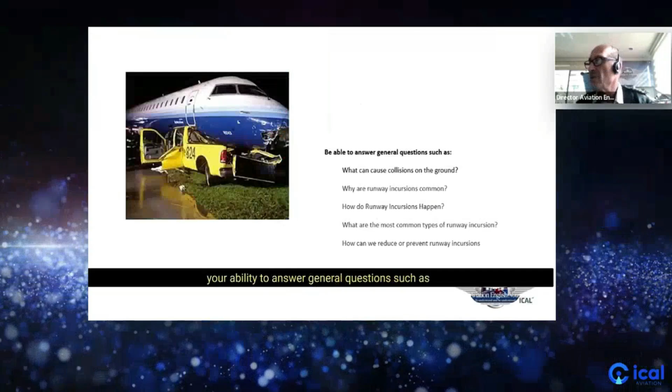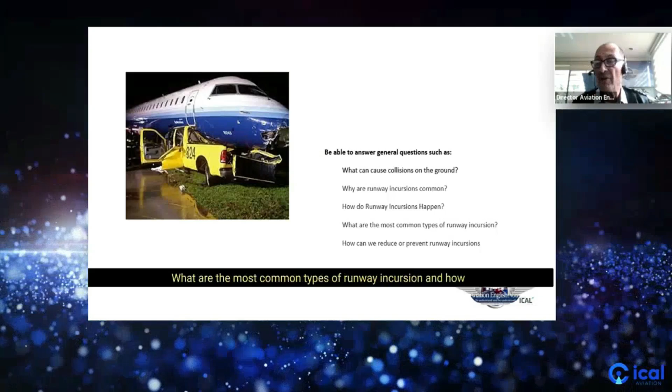A particular focus is going to be on your ability to answer general questions, such as what can cause collisions on the ground, why are runway incursions common, how do runway incursions occur, what are the most common types of runway incursion, and how can we reduce them. When we're in our ICAO exams, doesn't matter if we're listening to the ELPAC, the ELTS, the TEA, AVANT, or any other exam ICAO puts out there, your ability to understand the communication is critical.

For example: Situation 2. We can see some animals on the runway. You need to go around. So you're on approach, your controller's saying this, and it's critical that you're able to read back the complete message. What is the problem here? The problem is animals, but the main instruction is what the controller's saying: you need to go around. Why? Because we can see some animals on the runway.

Another example. Situation 6. We can't continue taxiing because there's a piece of rubbish on the taxiway. So what we have here is a pilot actually saying that he has a problem continuing taxiing. Why? Understanding the vocabulary - there is a piece of rubbish on not the runway, the taxiway. All the information is important, and we have to read it back correctly.

Situation 5. There's something on the runway. We can't take off. Pilot reporting he cannot take off. Why? There's something on the runway.

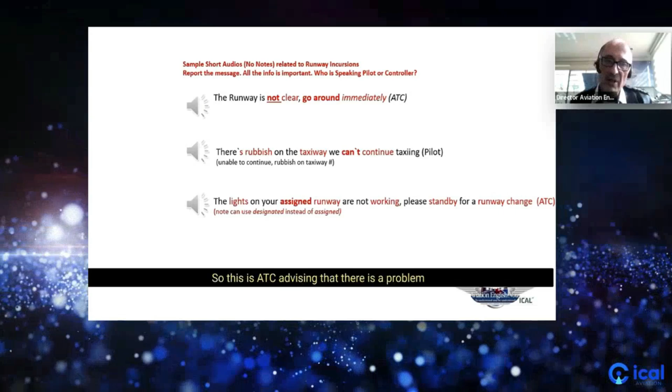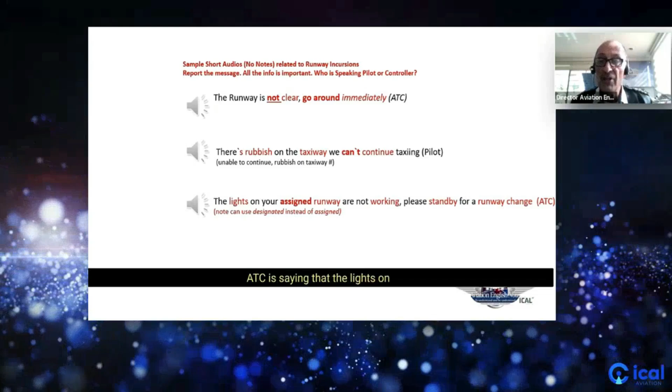Situation 4. The lights on your assigned runway are not working. Please stand by for a runway change. So this is ATC advising that there is a problem with the lights on our designated or assigned runway, and that we are to stand by for a runway change. Our response, if we were operational, would be: standing by, Viva Colombia 354. However, in the ICAO exam, it would be - I need all the information - ATC is saying that the lights on our designated runway are inoperative, and please stand by for a runway change.

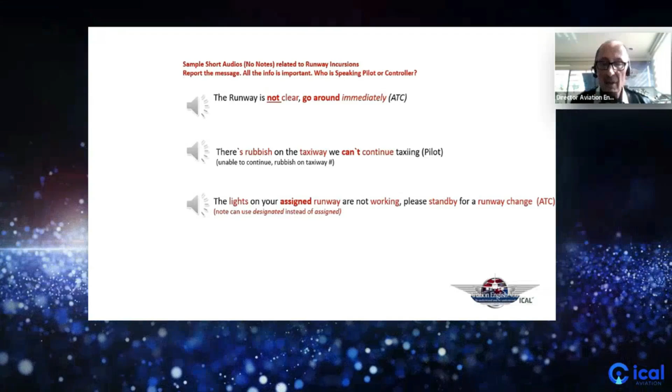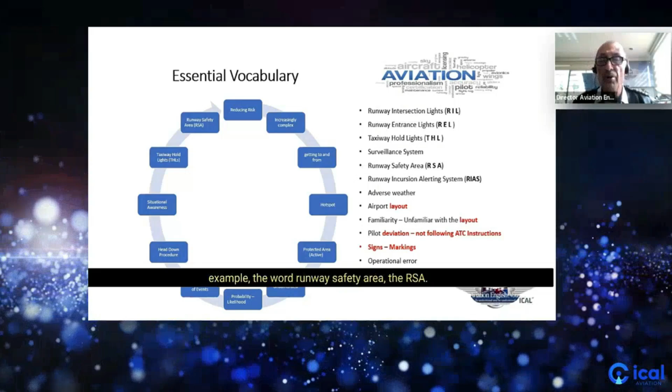The type of vocabulary we're going to be looking at today is on the right-hand side here. You'll notice that in prevention of runway incursions, we need to also understand the acronyms. Acronyms will come to us in a NOTAM or maybe in an ATIS that the RILs are not working - runway intersection lights, the runway entrance lights, REL, the taxiway hold lights, THL. Other words we've also looked at when we look, for example, at runway excursions are the runway safety area, the RSA.

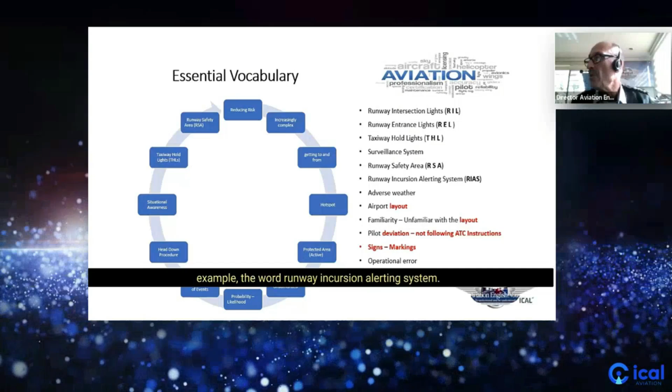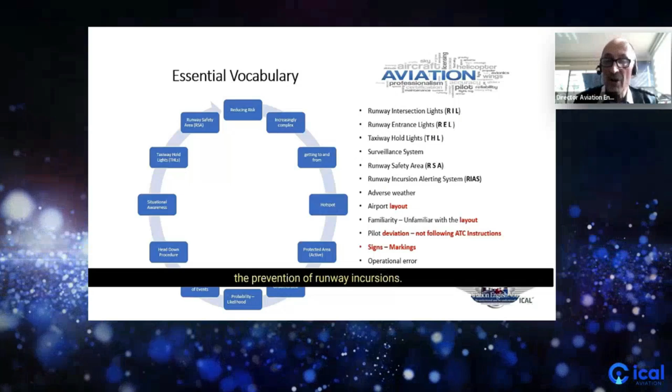When we're looking at the prevention of runway incursions, there are also acronyms we might use, for example, the runway incursion alerting system. Other words we're going to look at in detail today: obviously weather plays a role in the prevention of runway incursions. Airport layout plays a role in runway incursions, and familiarity with the layout is particularly important. Our problem, though, normally is what we call a pilot deviation - a pilot not following ATC instructions. So we need to understand the word deviation - the pilot is deviating, not following ATC instructions.

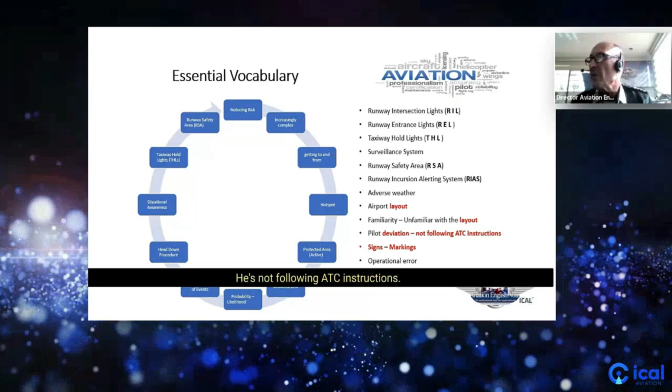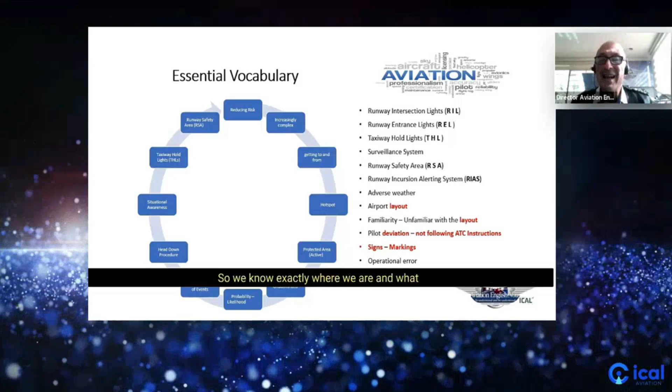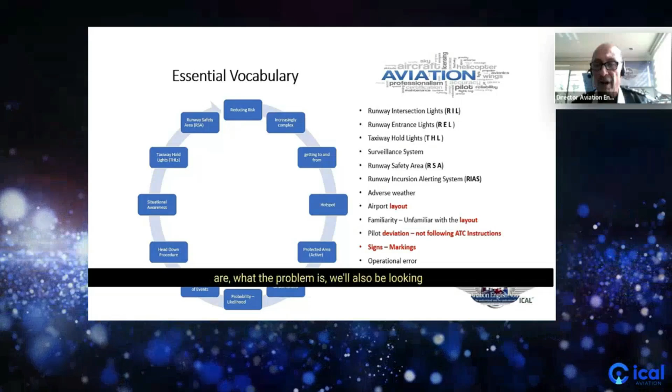Another critical factor in the prevention of runway incursions are good signs and markings, so we know exactly where we are and what any particular problems might be ahead of us, alerted by signs telling us where we are and what the problem is. We'll also be looking at operational error and heads-down procedures today.

Let's start off first by looking at the causes of major runway incursions and OEs - operational error. The critical thing, folks, is loss of situational awareness. Then misunderstanding the ATC and pilot communications. This is not just with foreign pilots flying into international airports such as Miami, but can also be with native pilots in the United States, misunderstanding and not following pilot communications. Also possibly a lapse in short-term memory - lapse meaning you forget something, you didn't write it down. And the classic: deviation, not following your company's SOPs. All of this boils down to the pilot and human error.